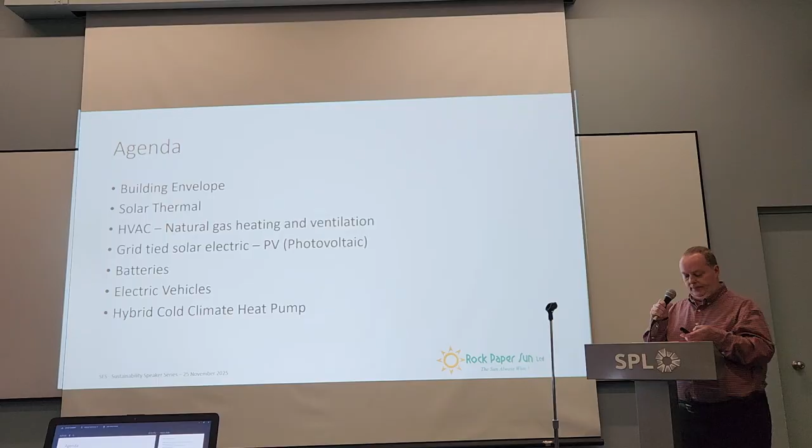Some of the reasons why I'm doing this now is I was made redundant in 2007 from the high-tech company I was working for in Saskatoon. So it was kind of a, what do I want to do next? Almost 20 years later, still doing this.

So a little bit about my home in Nutana. It was built in 2000. We moved in 2005. It's occupied by myself, my wife, mother-in-law, and our 2 teenage boys, one of which is now off at UBC. It's approximately 1,350 square feet on one level, with a basement below it as well. It's standard construction for 2000, 2x6, with an R20 batt in the wall.

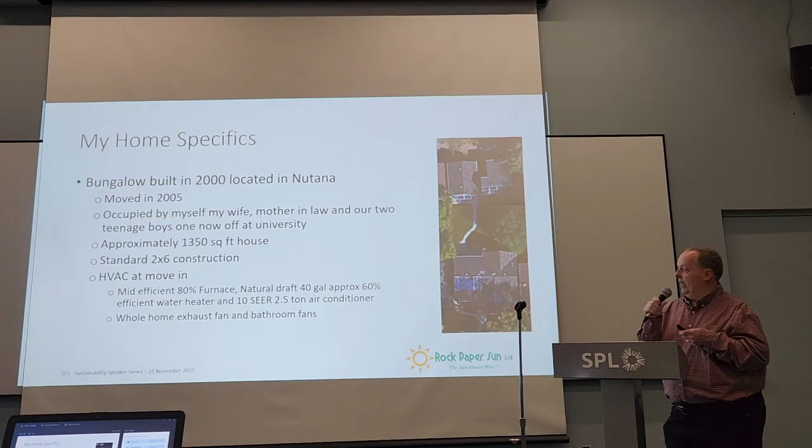The HVAC system when we moved in was a mid-efficient 80% furnace, builder basic natural draft water heater, 40 gallons, approximately 60% efficient, and it had a 10 SEER, 2.5-ton air conditioner. From a ventilation perspective, it had regular bathroom fans and a whole home exhaust fan, which was operated in the kitchen. You could draw air from that, but there was no balanced ventilation.

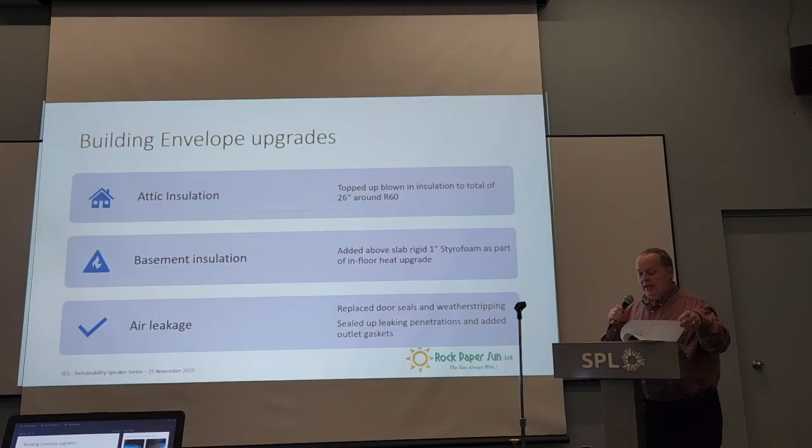So one of the first things I did was to think about the building itself, and building envelope upgrades for saving energy are one of the most important and one of the least expensive things you can do. The attic insulation was one of the things I topped up, probably added at least 10 inches to get a total of 26 inches, or around R60.

The basement insulation: a lot of new homes have insulation underneath the slab. In my case, there wasn't any insulation there. And so I added some internal insulation above the slab, which was rigid styrofoam. It was part of an in-floor heat upgrade that I made, and I'll talk a little bit more about that.

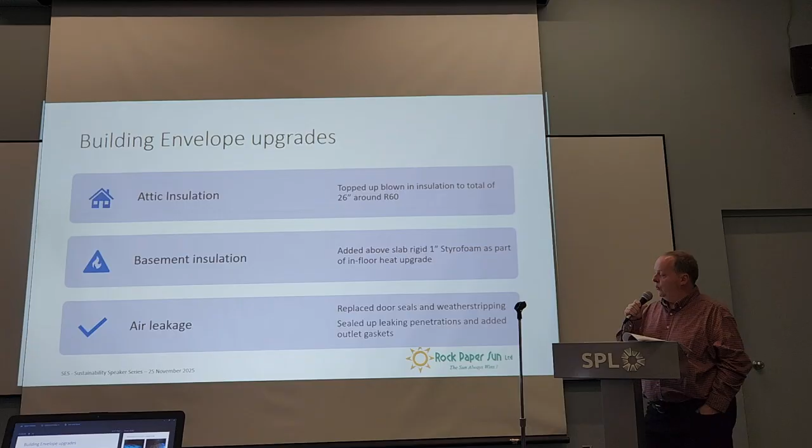Air leakage: just regular things like replaced door seals and weather stripping, sealed up leaking penetrations, and added some outlet gaskets. Air leakage is an interesting one. It's a huge proportion of a building's heat loss. So if you can get someone to do a blower door test, you can identify some of those sources of leaks and try and fix them. Okay.

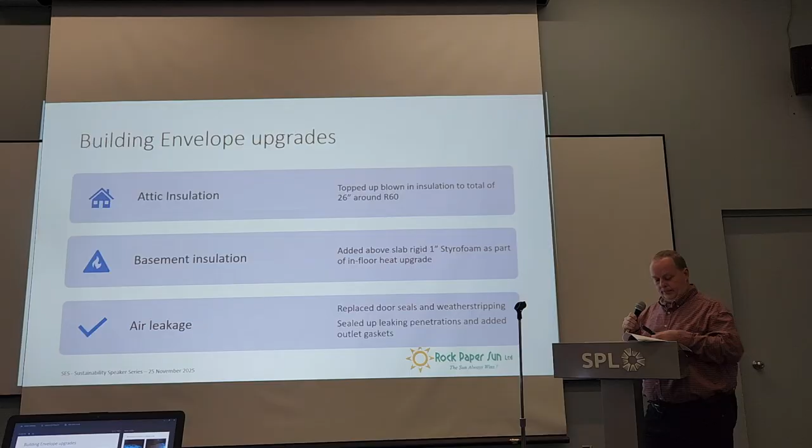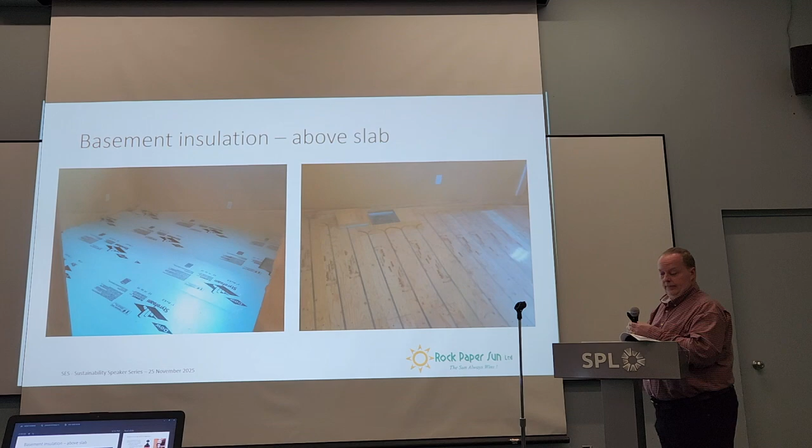An interesting thing that I wasn't expecting, because it's a relatively new build, is that my house has some issues with radon. I was fortunate to be at a presentation about radon, and a free test kit was available. So I put it in the home, followed the directions, and sent it off for analysis. And the results came back that the radon levels were higher than I was expecting.

It's exhausted outside. I then added an indoor air quality monitor, which allowed me to see that drop in radon and confirmed that the reduction level is back to the safe levels that are recommended by the government.

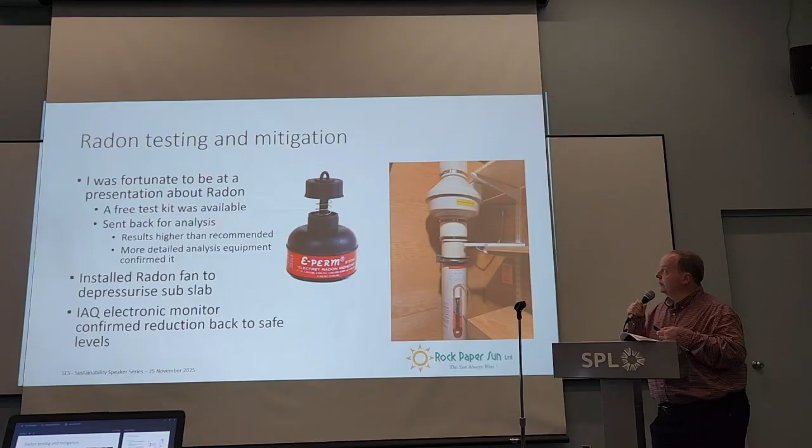And so then the first thing we did as a business, and really what got us into the business, was we wanted to put solar thermal on our own homes. Solar thermal is a way of taking the heat that's coming from the sun, capturing it in a storage tank, and then using that heat primarily for heating domestic hot water.

And so what happens is, with your existing tank, the water gets diverted around the solar storage tank, which preheats that water, and it goes back into your existing tank and out preheated. It's quite amazing the amount of heat you can see off one of these systems. On a minus 30 degree day, I often see plus 40 degree Celsius temperatures coming off the panels on the roof.

And my wife said I should tell you that when we were upgrading our heating system, we had two toddlers at the time who were in washable diapers, and we needed to be able to do laundry, and for a whole month we didn't have any other source of hot water. The regular water heater wasn't working. We just had solar and we didn't run out of hot water. It was in the summer; you're not going to get all the heat you need, but on an annual basis you're going to see 50 to 70%.

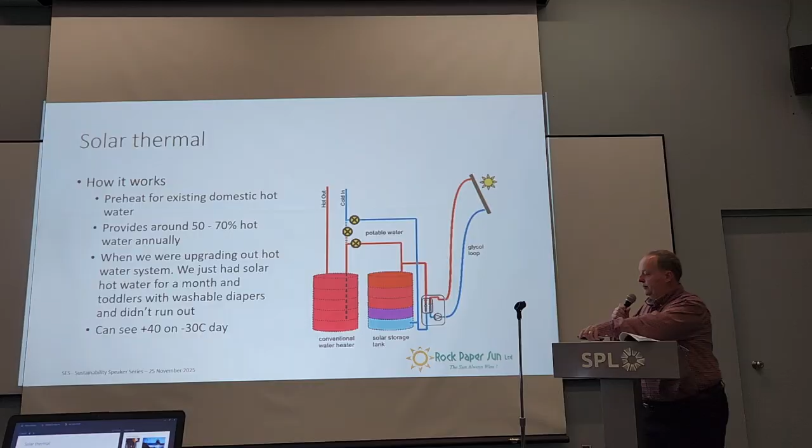Next step was my HVAC upgrades. As I said in one of the introductory slides, when I moved in, it was a very basic furnace and water heater. They were 80% efficient for the furnace and 60% efficient for the water heater. So I wanted to upgrade that heating and hot water equipment. At the time, there were Saskatchewan grants for energy improvements as well as federal grants.

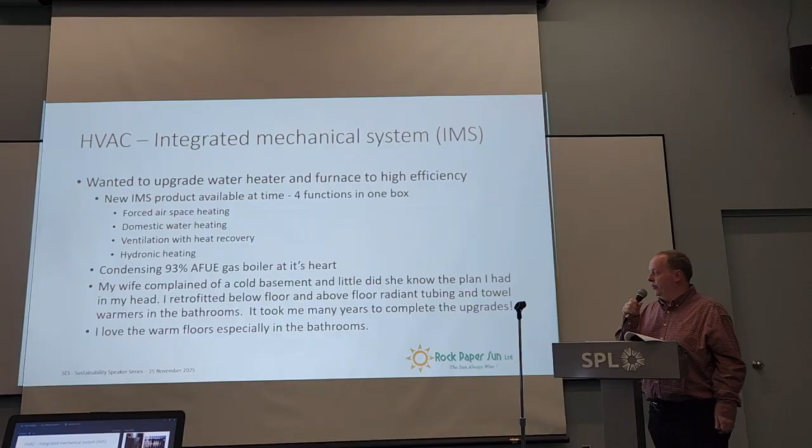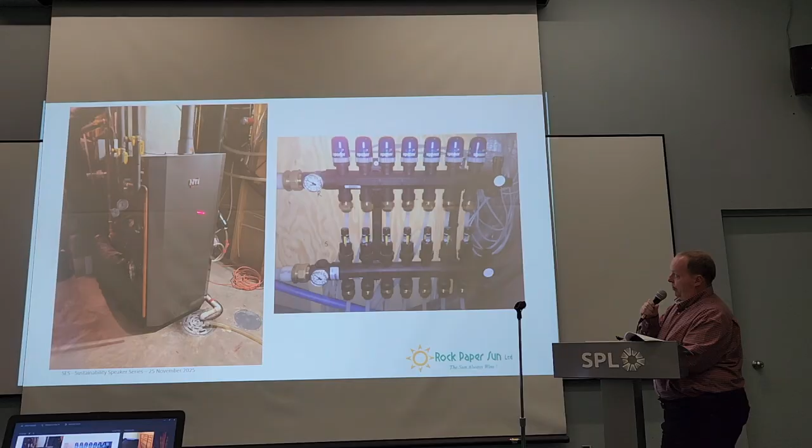So here's a picture on the left of the integrated mechanical system. In the top half here is a boiler, the bottom half is the HRV, and then coming off the side there's an indirect connection for domestic hot water, and then I have loops with manifold actuators here for the in-floor.

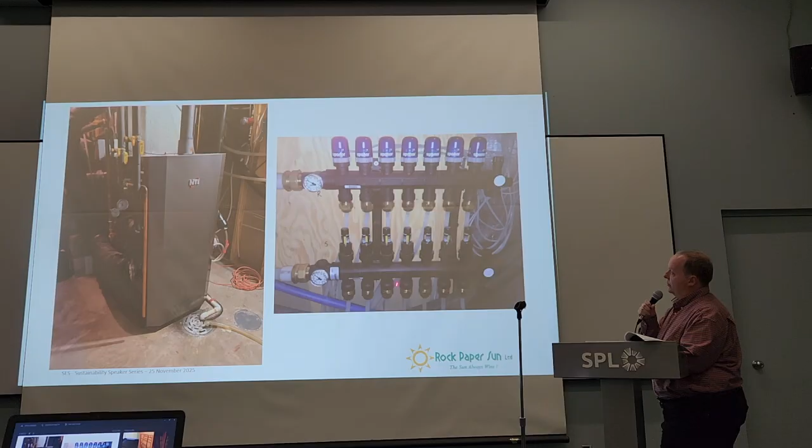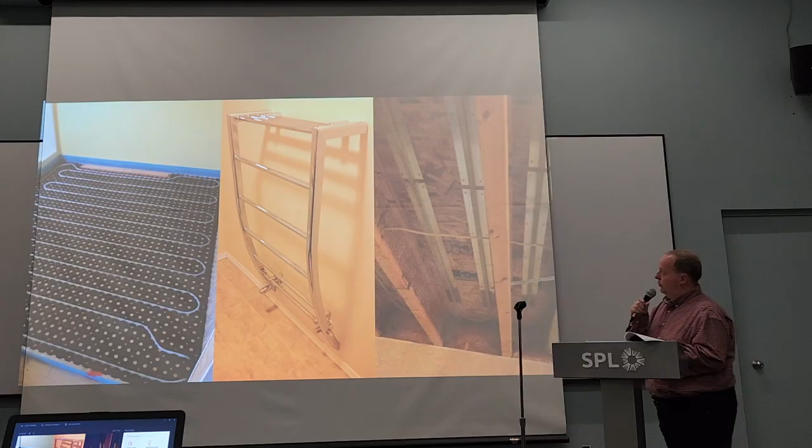And then for areas where I had hardwood flooring that I didn't want to remove, I put below that floor these aluminum plates with tubing between them, and then below that a layer of insulation to stop or try and minimize the amount of heat that would migrate down and try and force the heat up.

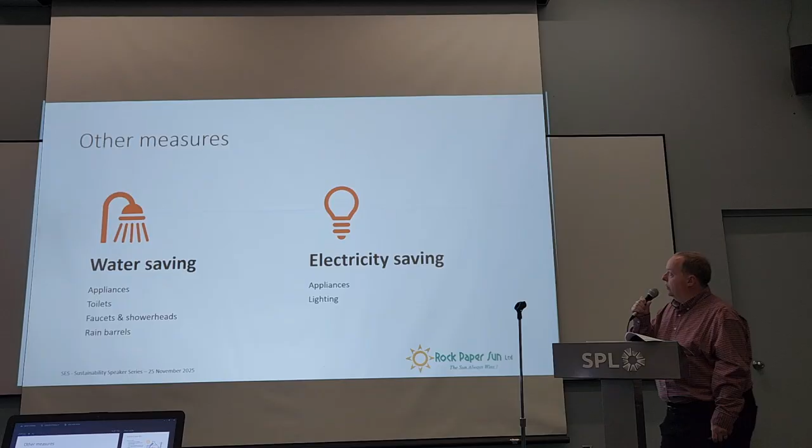Some of the other measures were smaller measures in general. When we moved in, we had no appliances, so we left the appliances at the previous building we were living at, and so we bought new appliances. European style appliances, typically smaller, more energy efficient, saving more water. I upgraded the toilets to be low flush style toilets, faucets and shower heads and aerators with lower flow rates, added rain barrels to the garden, and then the electricity.

So then a few years later, so we started the solar thermal around 2007, 2009, 2010. We started to do our first solar electric or photovoltaic systems. And for those of you that don't know how this works, it's a pretty straightforward process. You have a solar panel on the roof that produces DC, direct current electricity, kind of like a battery. And then the electricity we need in our homes is AC electricity, 240 volts.

And so the systems we've been installing have what's called a microinverter, and those are mounted behind the panel. And they take that 30 volts approximately of DC electricity and can invert it to 240 volts AC, which is compatible with your house. And so that electricity gets tied into your electrical panel. And so if your solar is generating energy, it gets used in your home first to power the loads inside your home.

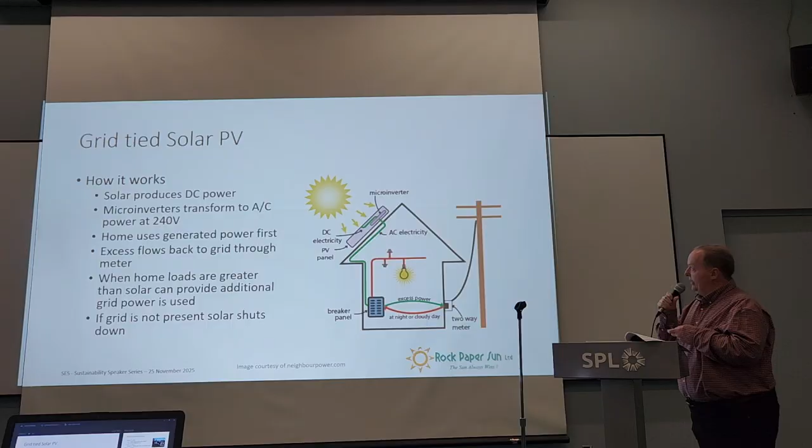One thing to note with grid-tied solar, 95% of the inverter systems out there say that when the utility grid is not present, solar cannot generate power either. Which means that although you've got this solar and a bad winter storm comes through, you don't get any energy out of the solar at that time. We're very fortunate here in the city, Saskatoon Light and Power, their reliability is pretty high, as well as SaskPower customers. The more remote you are in the province, I don't know how reliable the grid is. It's pretty good.

So I'm going to just talk through being in the business. You get to play with technology through the years, and so back in 2010, when I first put on solar electric panels, I added 12 185 watt panels for a whole big system size of 2.2 kilowatts. And the cost at that time was around $8,000 a kilowatt. So a very large expense.

We had a few panels left over from another project, 3 in fact, so I added those on in 2011 just to increase the size a little bit. Then by 2012, you can see the size of panels went up quite a lot in what was available, 255 watt panels now, and I added another 10. And then again, by the time we got to 2020, when I also added batteries to the system, the size of the panels had gone up another level to 325 watt approximately.

And so over the years, I've accumulated 15 kilowatts of panels and a total of 55 panels of varying size. By the time we were done in 2020, the costs were around $2,500 per kilowatt. As you can see, the price dropped a lot.

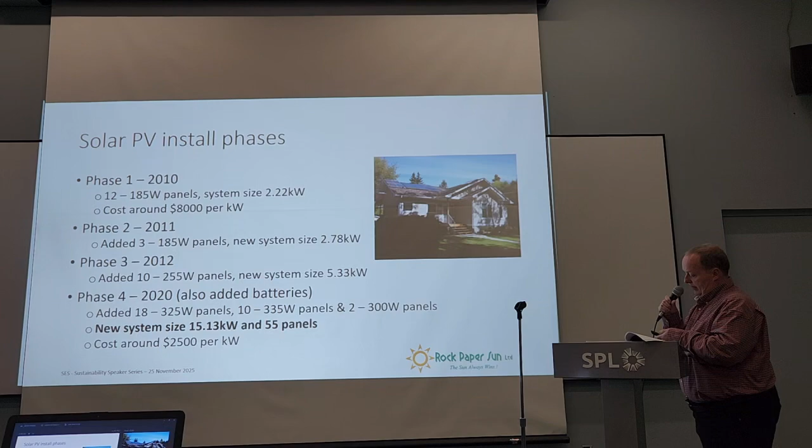The next few slides just show a little bit of detail of those phases. So 2010, we've just got the smaller panels surrounding my solar thermal. Solar thermal on the model here. There's 2 on this side, and there's east-west facing roof here. This is south facing.

I did a little bit of rearranging. As you can see, there's a little bit of shade on the roof. It's a mature tree neighborhood, and so solar thermal is less susceptible to shade, whereas solar PV is more susceptible to shade. So I relocated those in combination with I needed to replace... And so everything came off, rearranged things, and now I don't have any on the east roof. We just have 3 on the west, and the rest are on the south facing roof.

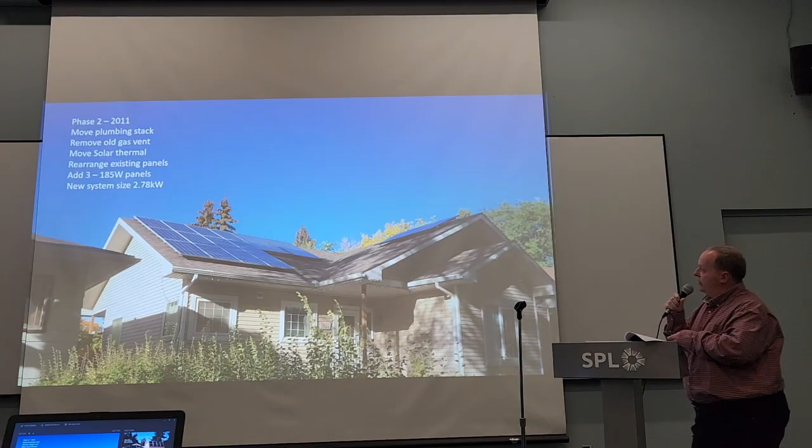And then in 2012, I built myself a workshop, the building on the right. The pitch of this roof is 60 degrees, and the north-facing roof here is 30 degrees. I wanted to try, based on some experience with other projects, a steeper sloped roof, and how that would work with shedding snow.

On the garage, you'll see there's 2 panels on the south-facing wall, and those are adjustable. I wanted to try and get some data at different angles, so I added an adjustable rack onto the end wall.

And then in 2020, I put panels on the east-west face of the garage roof and rearranged the bigger panels, the newer panels, to be the south-facing ones. You might just see there's 2 panels here on the north-facing roof as well, just because I wanted to know what the data was going to be like for those and how they would perform as well. And to answer that question maybe in advance, they're about 50% of the output of the south-facing panels, but not 0.

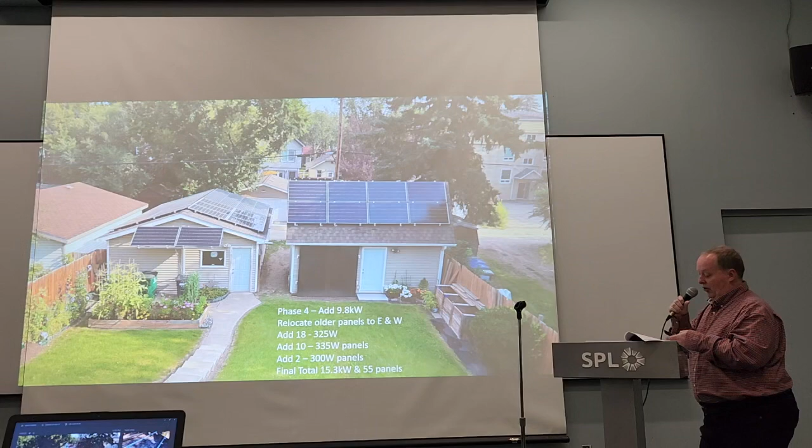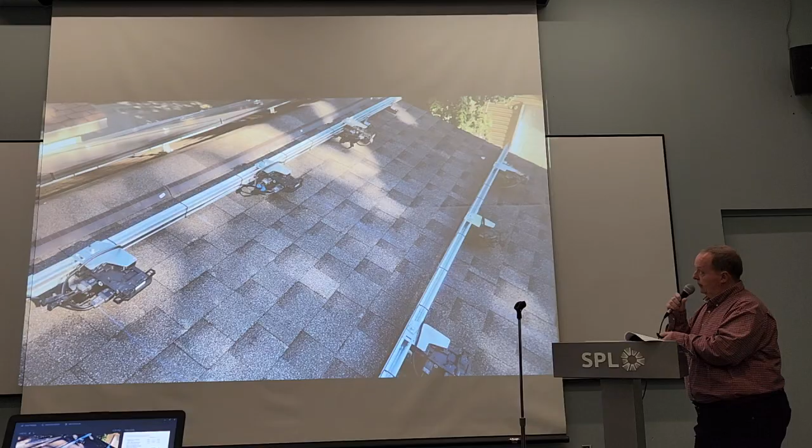Okay, so batteries with grid-tied solar. This was the next step. So batteries are charged by surplus solar energy. When they're fully charged, the excess power is fed back to the grid as it would have been without the batteries. When the home is using more power than solar can provide, it takes from the batteries until a minimum threshold is reached. The batteries are lithium iron phosphate, there's 0 maintenance, and they're warranted for 15 years.

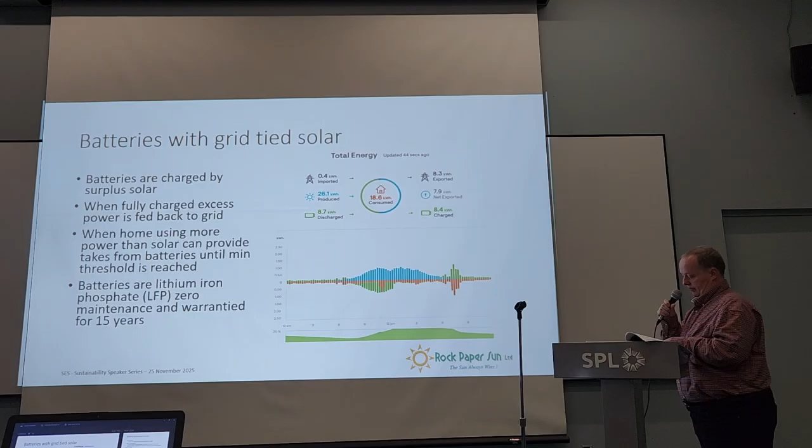So the system I have has multiple modes of operation. You can have full backup mode, which allows the system to back up loads in the event of an outage. And you can dynamically change this from an app on your phone whenever you want to. There's a self-consumption mode, which allows surplus solar production to be stored locally and used later. It might be a good model for SaskPower customers under newer net metering program agreements.

And the final mode of operation is a time of use one. It's targeted more at utilities that have time of use differences in their power rates, but it allows stored power to be used when electricity rates are highest. I believe SaskPower will at some point go to this time of use rate, so it would be a useful thing for most customers in that regard.

In some modes you can decide if you want to charge from the grid or from solar or a combination of both. You can also set thresholds for reserve capacity. I keep mine around 30%, unless I know there's a storm coming, and then I can set it to be fully charged, ready for that storm.

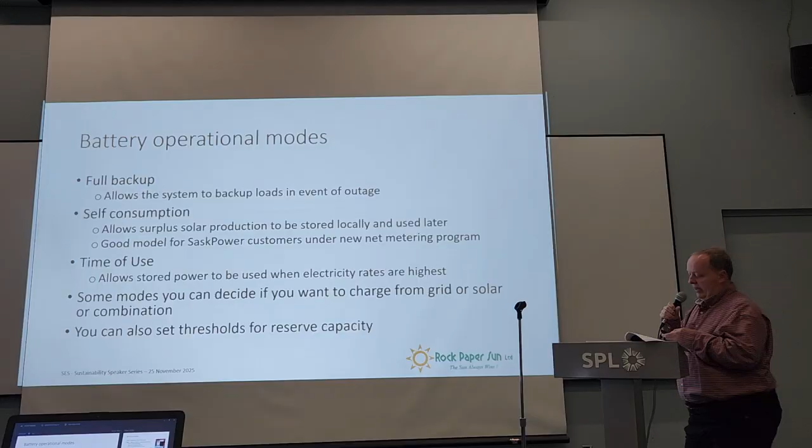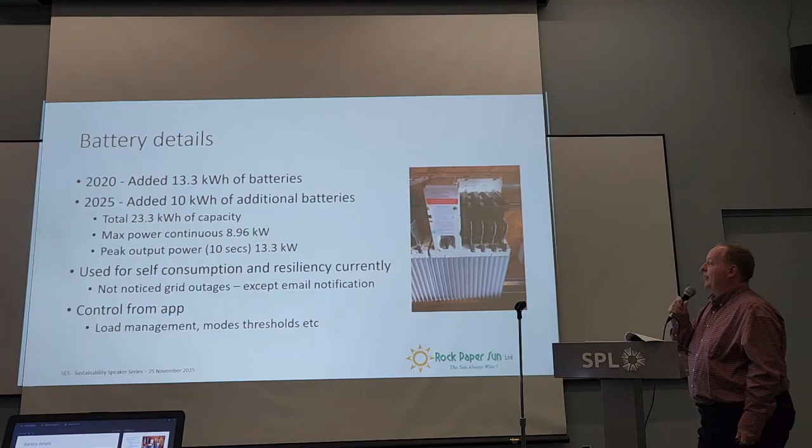But the side effect really is that I also want to have resiliency if we do get storms or more severe weather. And I've had, I think now 3 power outages, and I haven't noticed them. My neighbours go black and I just carry on. It's kind of interesting. You get a message that the grid's out. Oh, okay. All of it's controllable by an app, the load management, the mode thresholds, etc.

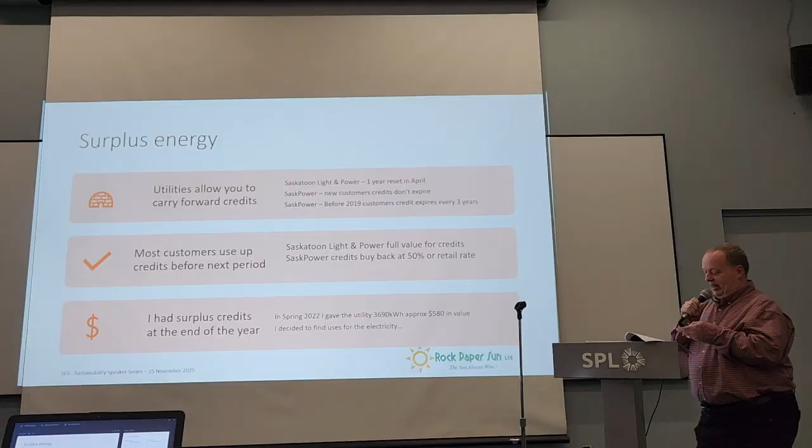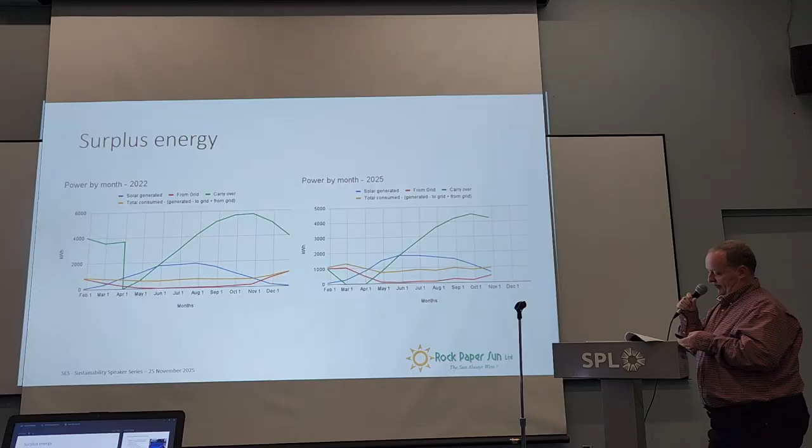And so you can see here the blue line on the 2022 chart. Our blue line is the solar that I'm generating. The red line is the energy that I'm asking from the utility. And the total consumed is the yellow line, and then the carryover is the green line. As you can see, because the utility reset my balance to 0, I get that steep drop in the green line there. And so by 2025, I'd fixed that. I'd used up my energy before they took it away from me. And this is how I did it.

I added an electric vehicle. Had to wait. It was kind of during COVID times, just coming out of it. Everything was slow. They had production issues, callbacks and things like that. But anyway, I ended up with a vehicle. I'm very happy with it. It approximately reduced that surplus by another 20%, down from the 35% I had. The service upgrades I made to add batteries, etc., made it easy to add the charging infrastructure in the garage.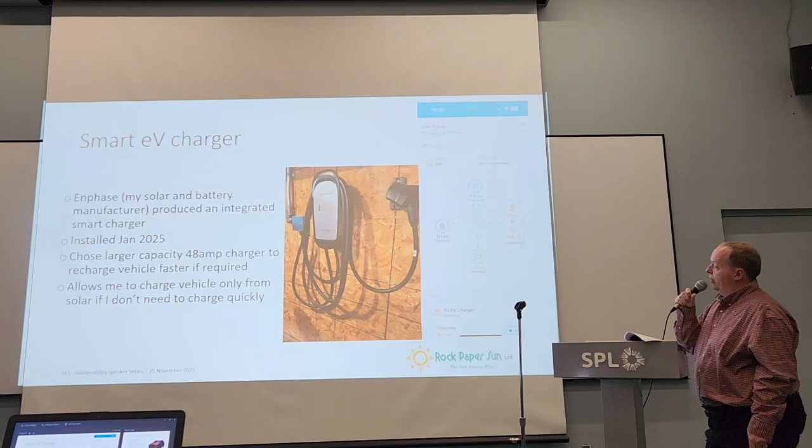Recently, I've added a smart EV charger. So the manufacturer of the inverters and batteries produced an integrated smart charger. And what that does, it allows me to say to the charger, I only want to charge my vehicle when there's surplus solar energy or surplus stored in my batteries, if I don't care about how fast the vehicle charges.

So I can plug it in on a weekend and recharge it slowly, because it will vary the rate of charge depending on what is being produced by the solar panels. But I optionally can also charge it at full speed rate as well. And I have the ability to do that directly when I plug in or through the app.

And if you look at the app here, you might be able to see that this was the solar generating at the time. This was live, and then 1.2 kilowatts going to my batteries on the wall of my building, and then the remainder was going to feed my house and then to charge my vehicle as well, and a little bit was flowing back to the grid as well.

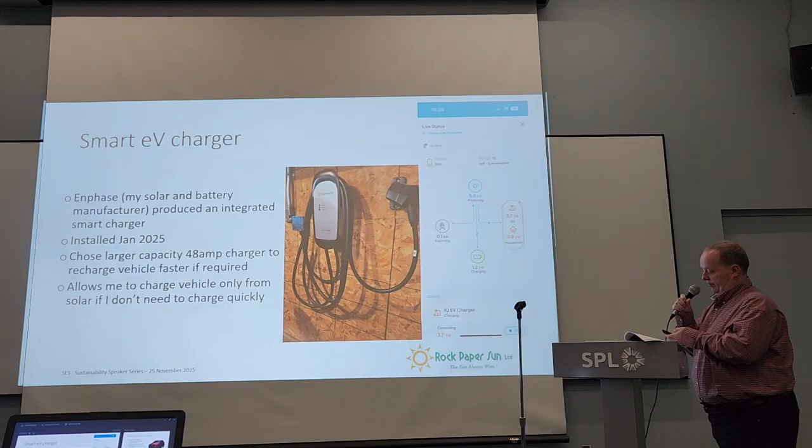And then we had another vehicle that was a hybrid that we wanted to replace as well. And so my youngest son competes in speed skating events in Calgary. And so driving a pure battery electric vehicle was pretty hard to do on that route to Calgary. The infrastructure to recharge and the spacing was hard, so we decided we still needed some form of internal combustion engine. So we went with a plug-in hybrid vehicle, and that's what we chose.

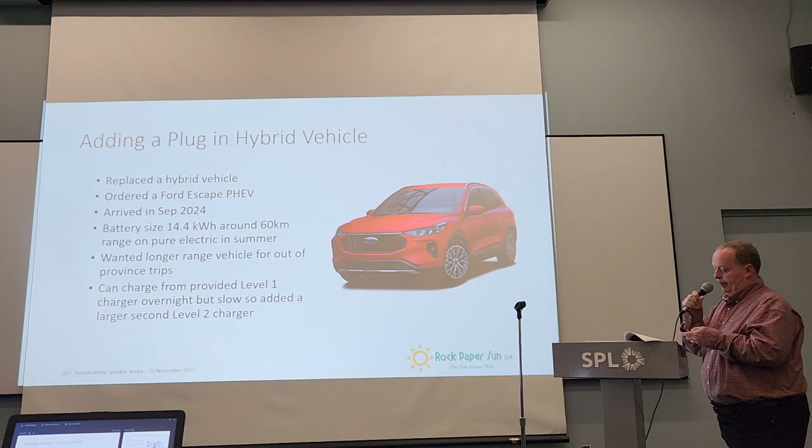The physics of it, and you go from low pressure to high pressure, low temperature to high temperature. It's just the same as a regular air conditioner, except it's working in reverse. If you think about your refrigerator in your home, it's doing the same thing. It's removing heat from inside the fridge. It's not adding cold, it's removing heat.

Anyway, heat pumps have been around for a long time. The difference is now there are what's called cold climate heat pumps, and they have the ability to work at temperatures below -5 Celsius outside, and as low as -30 Celsius. So in this climate, as you're well aware, we get below -30. So we can't just use a heat pump on its own, and we need a backup of second stage heat.

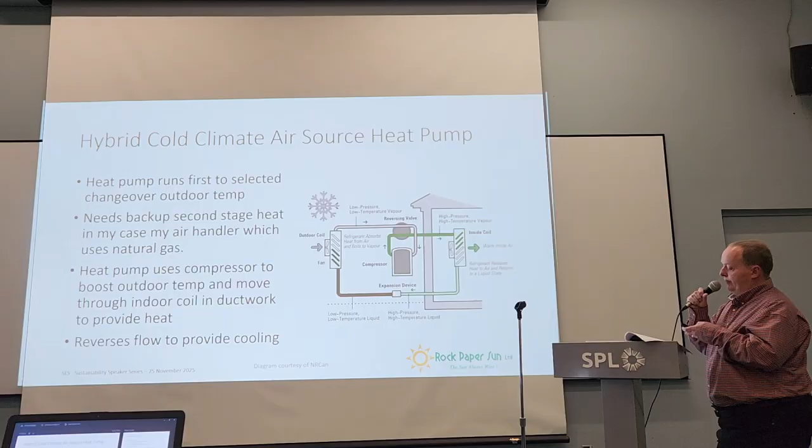So a little bit of detail about the specific equipment that I installed. It was added in 2024, and as I said, I replaced a 24-year-old air conditioner that was only 10 SEER with a 3-ton GREE outdoor unit, and added a new indoor coil, line set and wiring. The new unit in cooling mode is a 17 SEER.

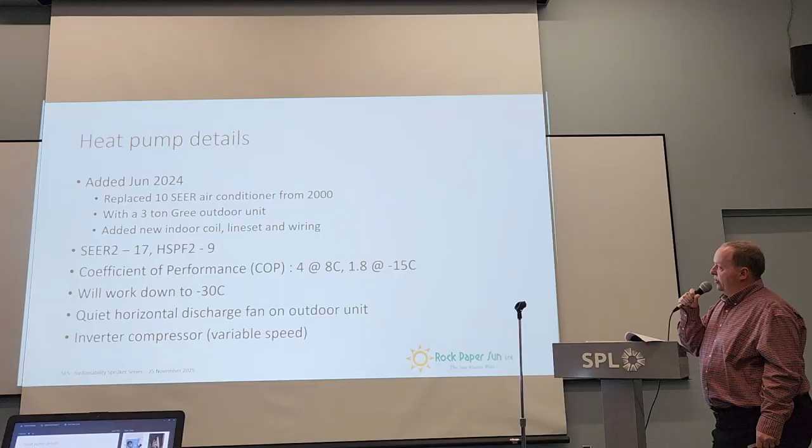SEER 2 is the new standard, and then this HSPF is its heating rating, and it has a performance of 9 in that category. Coefficient of performance shows how much you're getting out of the system for every unit of energy you put in. With an outdoor temperature of 8 degrees C, you get 4 units of energy out. When the temperature drops to -15, you only get 1.8 times the energy out. The system will work down to -30. It has a quiet horizontal discharge fan on the outdoor unit. It has an inverter compressor, variable speed, that can ramp up or down to meet different loads.

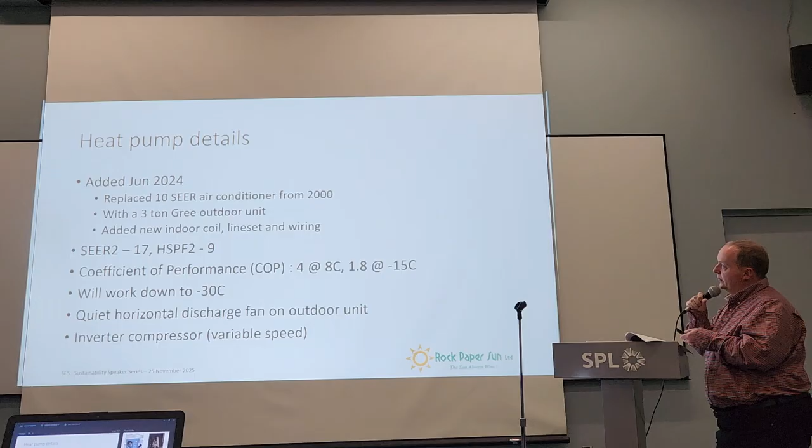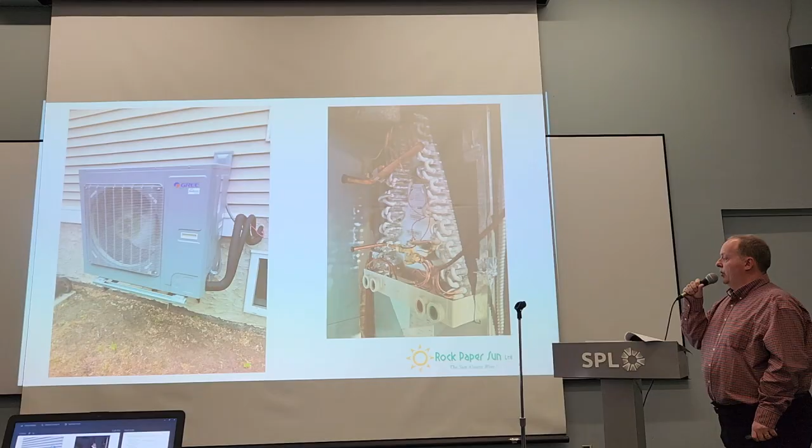One thing I wanted to mention is that because these are now running in the wintertime, you need to put them off the ground, so you can mount them. In this case, it's mounted on the wall about 2 feet off the ground. You can get a stand as well that you can put them on. The reason for this is they go into what's called a defrost cycle, and they defrost the coils, and they produce condensate, and that condensate needs to run away. If it sits in the bottom of the unit, it would freeze up, and then the unit wouldn't work. So if you're getting somebody to install this, make sure they know what they're doing. There's been a number that have been installed on the ground and had problems.

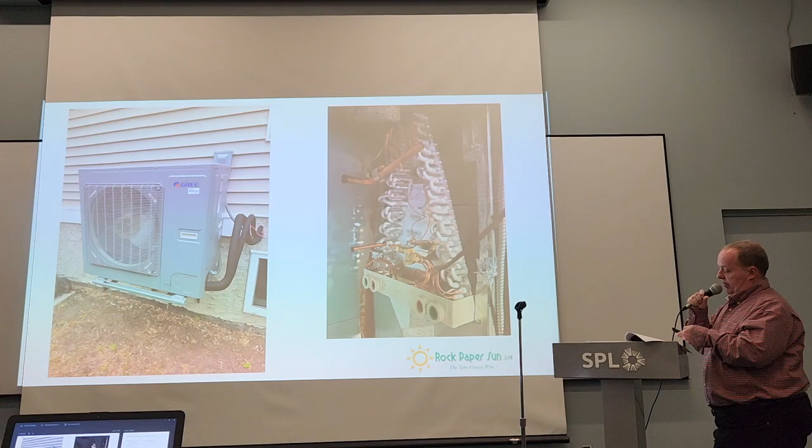Inside the base it has a heater that comes on to keep that condensate as liquid. As you can imagine, it would freeze at the outdoor temperatures, but it keeps it liquid until it leaves the unit.

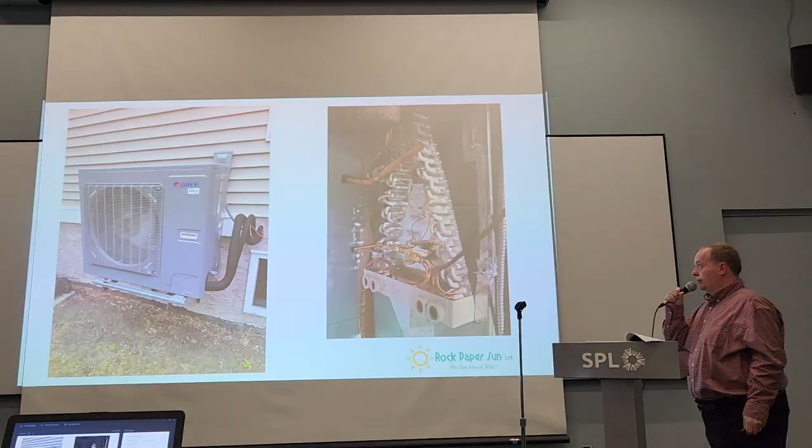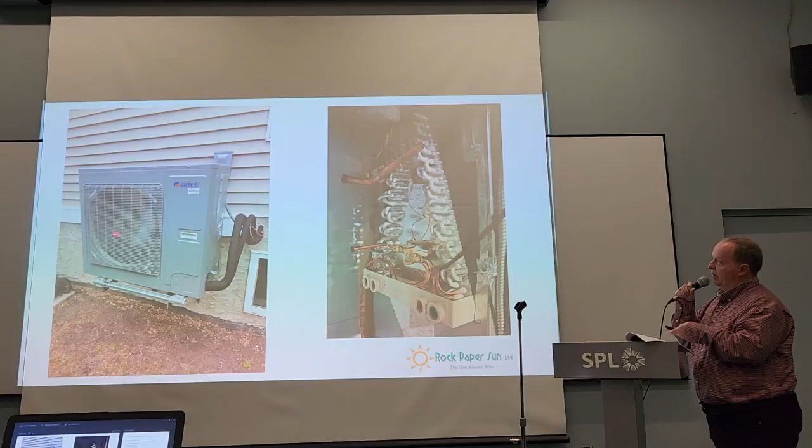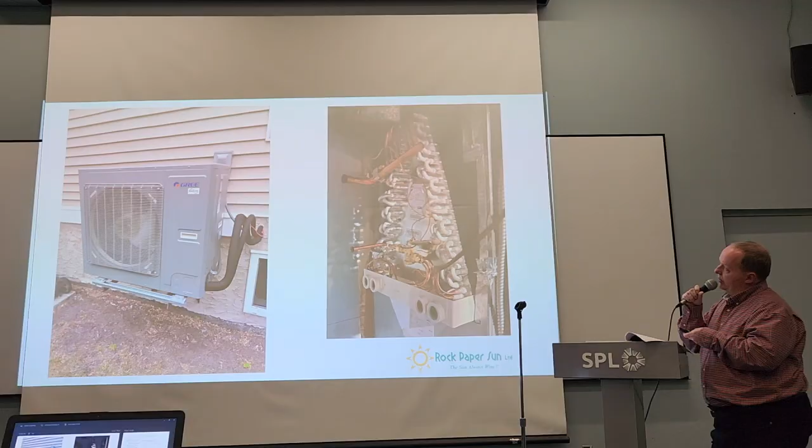Other things you should be aware of is that you may need to do more maintenance during the winter, because if you have a snowstorm or a blizzard, this thing still needs to work. And so, you need to make sure that snow isn't getting stuck in the fan, stopping it from turning. In fact, this is underneath an eave, but the eave's quite high up, so I did have to clear out snow one winter to get it to continue to work. Something to be aware of.

Okay, some people may know about balance point, but I'm just going to go very briefly through this. What I've done is I've plotted on this chart the heat loss from my building, which is the red line. As you can see, at 21 degrees Celsius, there is no heat loss because that's the same temperature as the inside of the building. When it's minus 30 outside, I have around 35,000 BTUs an hour leaving the building. And so I have to replace those with the heating system.

Now, the heat pump has different efficiencies, COP, at different temperatures. And so I took the data from the manufacturer and plotted that blue line. It can't produce heat below minus 30, so that's why the line drops off at minus 30. But as you can see, if I want to heat my home at minus 30, my heat pump won't put out the heat I need, which is here, at minus 30. So this point here is called the balance point. This is when my heat pump will match the load of my building. So everything to the right of here, my heat pump can now do, but everything to the left of here, it can't keep up.

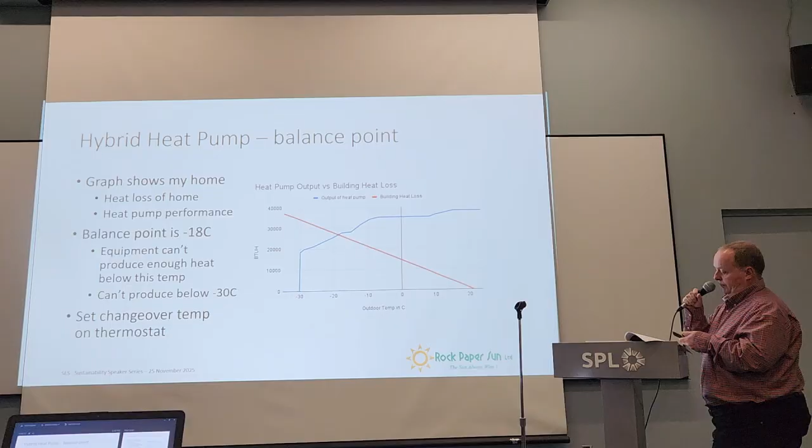Okay, I'm the engineer, so there's another graph. So what I've done here is I've tried to quantify what the cost difference is between electricity running a heat pump and if you were doing the same thing with natural gas. Now, people might not be aware that natural gas per unit energy is currently, in our province at least, 7 times less cost than that of the electricity.

So when I take into account the fact of maybe a 93% efficient boiler, that drops to only a 6.7 time difference. And then the COP of the heat pump helps, but even then gas is still 3 times or less cost than it would be if you were heating with electricity.

So in my case, it's not a problem because I'm using that solar free energy that I've banked, so I'm not paying these costs. But if you were getting the energy directly from the utility, you are going to pay more. So you need to make the decision whether it's worth it for you to pay that additional money to offset the carbon.

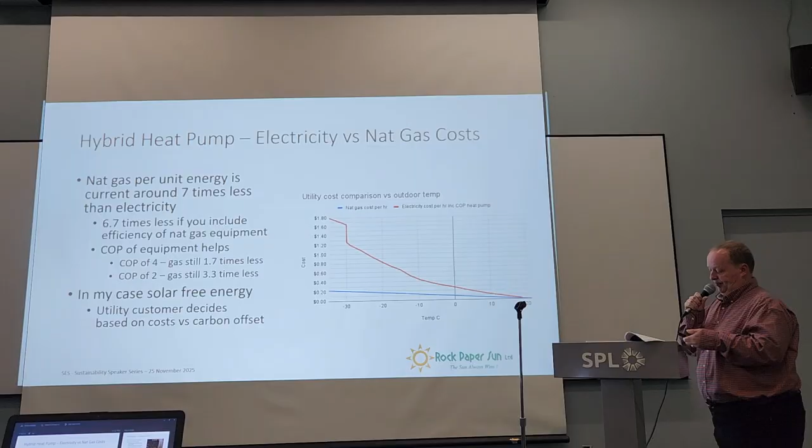The last thing I've had installed in the last month, I've installed for a number of other customers. I got involved with a Greenbox pilot program. What this little box does is it wires into your heat pump. It's a hybrid heat pump system, so there is a backup. And in this case, they all wanted to be natural gas backup.

And what it does is it gives you the ability, although the thermostat is saying I want to use the heat pump right now, it can say, no, I'm actually going to use natural gas instead, based on a control. And you can make that trade-off analysis. You say, well, okay, I want it to be lower cost right now, or I want to reduce my carbon footprint. It gives you the ability to easily change that changeover temperature or lockout temperature.

And I'm working with the team, they're based out of Ontario, to try and improve their design a little bit to take into consideration customers that have solar in combination with heat pumps. In my case, I'd like to be able to use my solar credits, so be able to see those being used up and then stop potentially using the heat pump until the spring and I have more credits again. But also the ability to only use the heat pump when solar is generating and maybe when there's surplus power as well. So those are some additions that they're hoping to add for me.

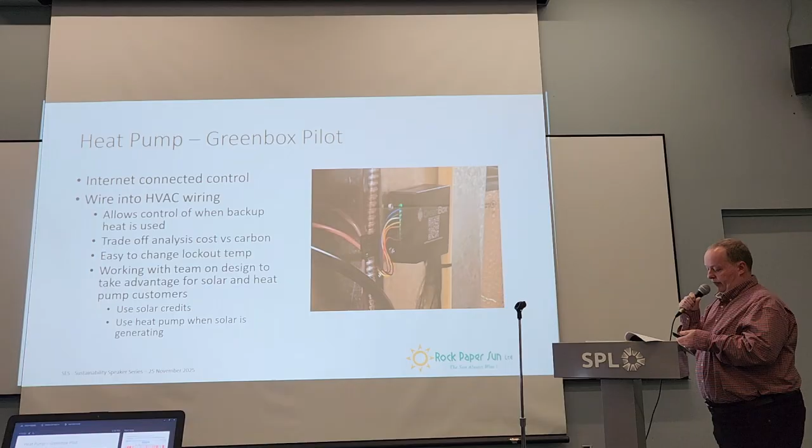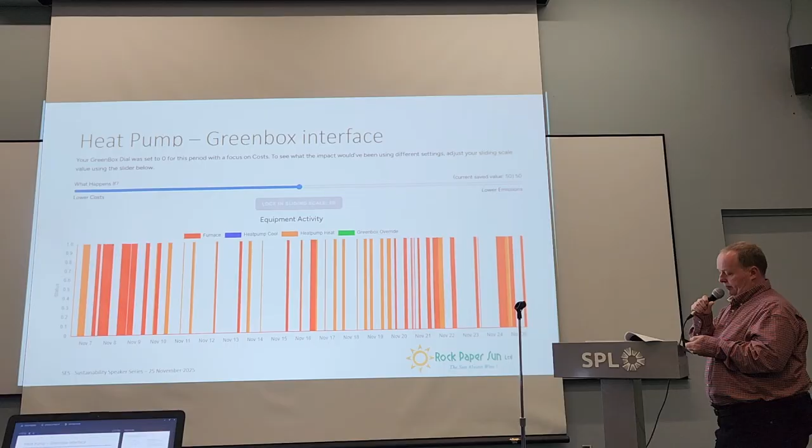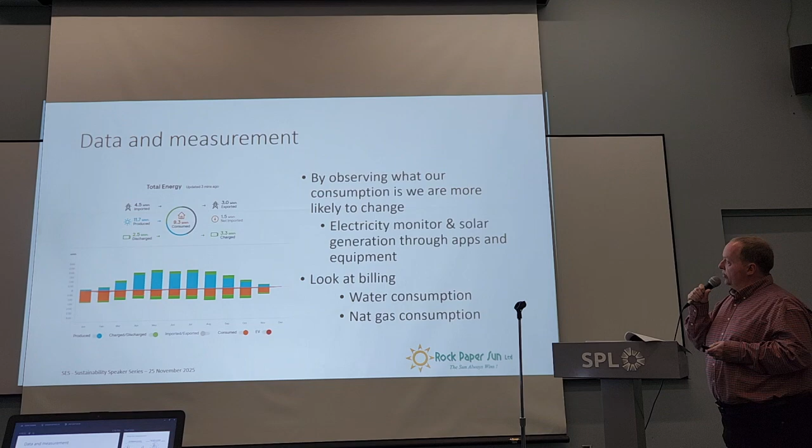So again, engineering, we like to measure things, and so data measurement, by observing what we're consuming, we're more likely to change. And so the solar and a number of other monitoring systems in my home allow me to look at what I'm using, what I'm generating. And you can do that even by looking at billing. My wife for a number of years has been doing that.

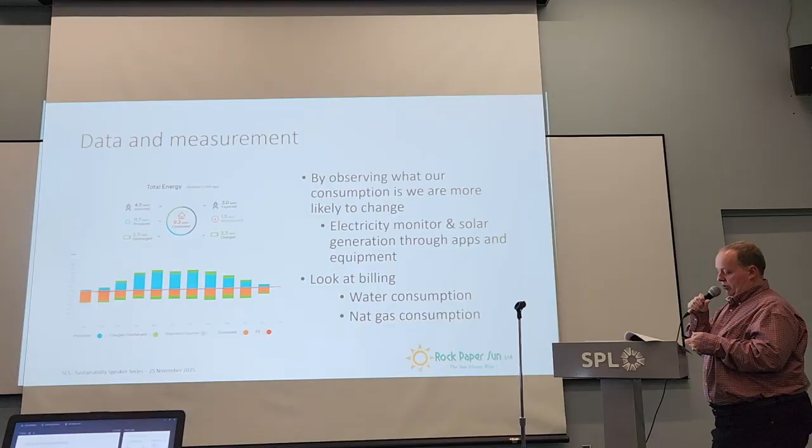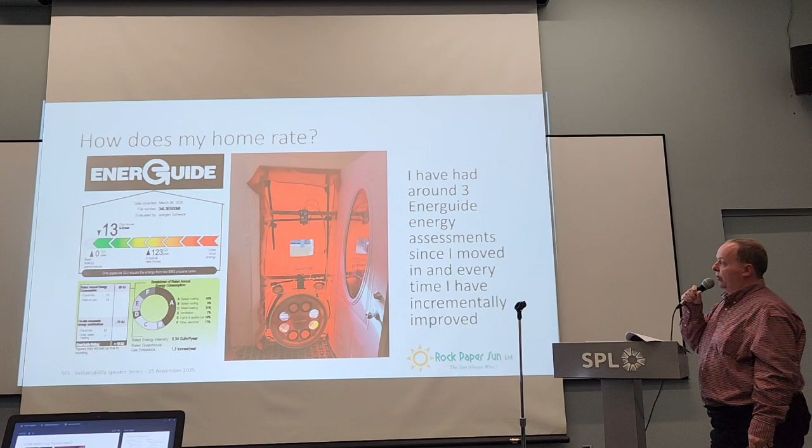So if you're picking or sizing equipment, on the solar side of things, what we tend to do is look at the existing annual load from your utility bills in kilowatt hours, and then we look at the available space that you have on your property, be it on roof or on the ground, the direction and pitch of roofs, and future loads, EVs, heat pumps, etc. My recommendation is go as big as you can, because you will always find uses for that electricity.

Batteries. So how much do you want to back up? Go through an equipment list, see which things are important to you, and how long an outage you are willing to suffer. The cost increases the longer the duration you want to be off the grid.

Heat pump sizing. Talk to an installer or a designer. Look for the most efficient equipment you can afford. There's Energy Star Most Efficient equipment. Look at the ratings, inverter compressor, right size the equipment. I can't emphasize this more. Don't just go for the biggest thing you can find.

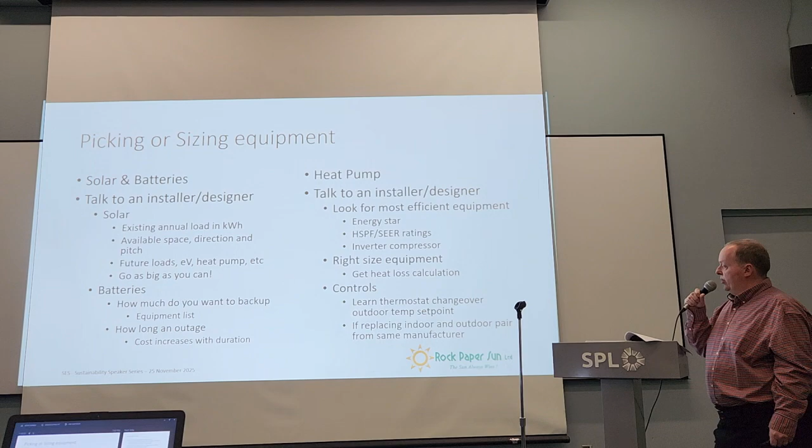If you are replacing both pieces of equipment, not just adding the heat pump and reusing the existing heating equipment for the backup, then I would recommend using the same manufacturer for both. You get a little bit more efficiency because those two pieces of equipment can talk a little better to each other and get the units to ramp up and down more in sync. They all work better.

Something about the costs of equipment. As I mentioned earlier, my $8,000 a kilowatt back in 2007, those costs have come down about 85% in those 18 years. We're now at around 2,500 to 3,500 per kilowatt installed, and it really depends on the size of the system. The smaller the system, it's a little bit higher.

The larger the system, there's still a certain amount of infrastructure that's required regardless of the size of system that factors into that. The average systems we've been installing typically are in the 6 kilowatt range, around that $15,000 mark.

Battery systems, if you add a battery to the system, will almost certainly double the cost of the system or more. It's not a cheap option, but it depends how important it is to you to have that backup energy, that resiliency, and or other uses for it.

Hybrid heat pumps, they're custom sized around the building requirements, so there's not one cost fits all. Smaller systems reusing an existing furnace should be less than 10,000.

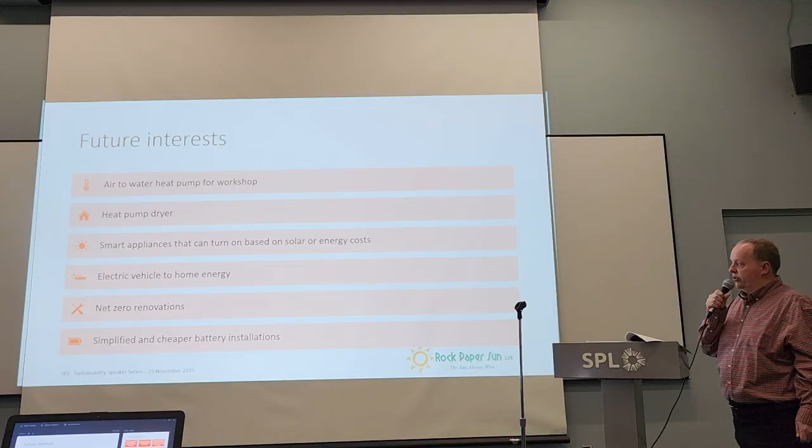I think in the future those appliances we're now replacing will have smarts in them that can turn on based on solar or energy costs at the time. The future with electric vehicles, you can link them to the home as well, so rather than adding dedicated batteries, you may be able to use your electric vehicle in the future to power your home. There are goals from the government and the Canadian Home Builders Association to put out standards for net zero renovations. So I'm interested in that and working with customers on projects along those lines. I'm hoping for simplified and cheaper battery installations moving forwards.

A few recommendations for you. You did mention this. If you're going to get heating, ventilation, air conditioning equipment upgrades, always ask the contractor for a heat loss gain calculation to right size that equipment. If you're considering replacing your air conditioning, your cooling system, consider replacing it with a heat pump. Even if you don't use the heat pump initially, you will end up with a very efficient air conditioner, and then you have the ability to use it for heating when it becomes more economically viable for you, when the cost of natural gas goes up or electricity comes down.

Look for experienced contractors. They'll usually be busy. I can testify to that. Ask for referrals to talk to their customers. If you're going to put in solar, I would recommend PV over solar thermal. There's no maintenance required and no limit to the feedback. You're not limited by the size of the storage tank. You can feed back to the grid as much as you want.

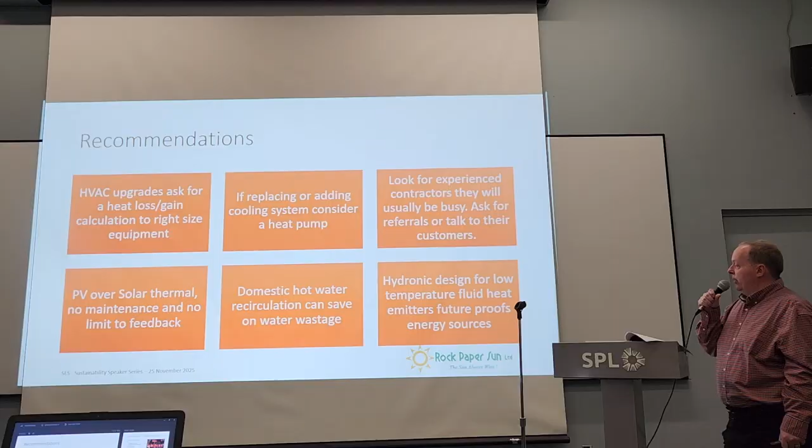One thing I didn't show a picture of, I have a domestic hot water recirculation pump, and that can save some costs on water that's running down the drain whilst you're waiting for hot water to get to the faucet. It's on a timer, so it only runs at certain times of the day. You can also have them controlled by temperature, so they only run until the water in that line is hot. So you only have to run a small amount of water from the pipe directly below the sink to the faucet.

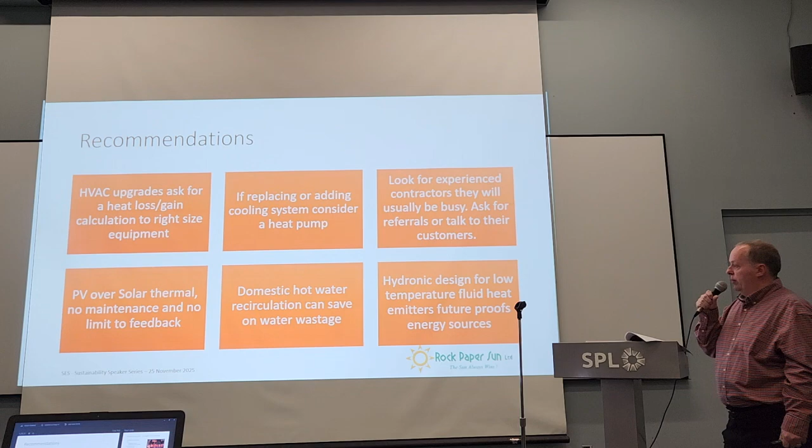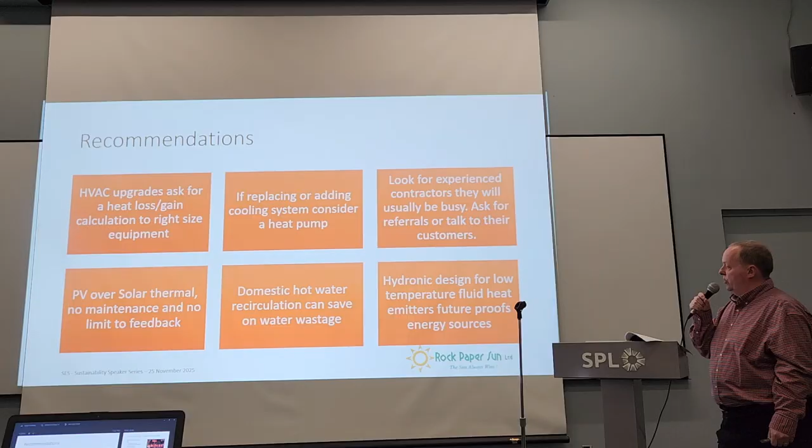And always, if you have a hydronic system, the lower the temperature you can get the building to be heated at, it will future-proof the system. So if you do replace the equipment from a natural gas boiler to a heat pump or to other renewable sources, it's a lot easier to do if you thought about the design initially that it was going to run at a lower temperature.

Some useful resources for you if you want to Google some of the following. The Canadian Renewable Energy Association has a Go Solar Guide. There's lots of good information in there if you're considering adding solar to your building. Natural Resources Canada has a resource called Keeping the Heat In. It's a really good document about renovating your home and how you can insulate and air seal, etc. NRCan also runs the EnerGuide program, home evaluation. Really worthwhile getting an energy audit completed, and you can know where you're at and what's possible.

City of Saskatoon has some great resources on their website. The solar heat map is the picture on the right here. Kind of gives you an idea of the potential of roofs. They have for their electricity and water customers a utility called SmartUTIL, which shows consumption. I think it's on 15-minute increments. They have the HELP program, which I used in my own home, which is a low-cost home energy loan, which allows you to buy and retrofit energy

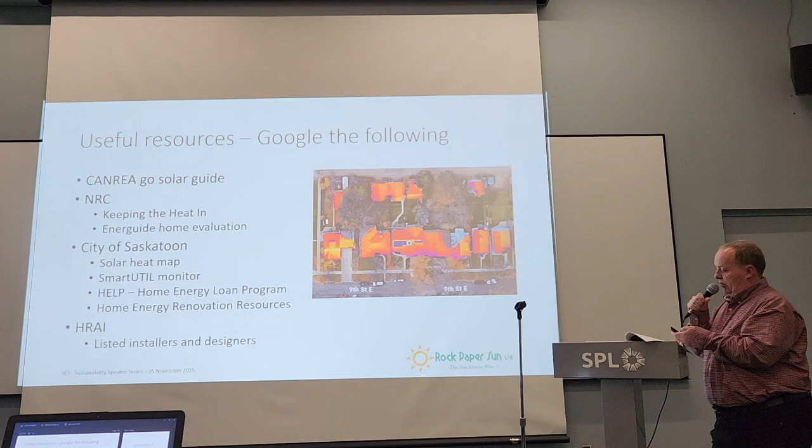Sure there's going to be a few questions.